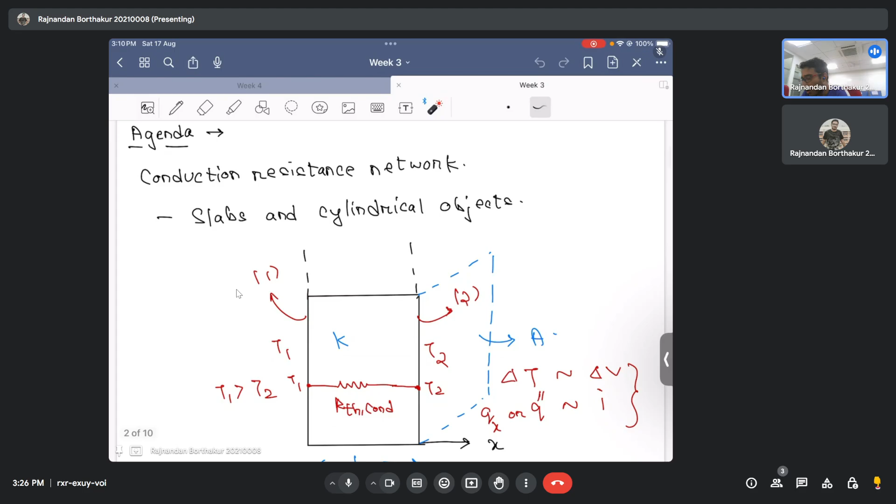But before that, let's quickly recap what we did in the previous week. We looked into the conduction resistance network, another way of calculating the rate of heat transfer in conduction. For instance, in a slab, if there was no heat generation, the mode of heat transfer is conduction, and the direction of heat transfer is one-directional, then an alternative way of calculating the rate of heat transfer is by using the conduction resistance network analysis.

And I said that this network philosophy that we saw can also be extended to radiation and convection as well.

Nevertheless, you need to understand that when you write the rate of heat transfer, in this special example, one face was maintained at temperature T1, the other at T2, and so long as there was no heat generation and thermal conductivity was constant, I can represent the temperature profile as linear. In that case, I can use the resistance network, which lets me write the rate of heat transfer as the difference in temperature between the two faces divided by all the resistances that come into the picture between the two temperature nodes.

For instance, in this case there is only one resistance offered by the slab, and that's why it becomes L by K. Now, we also discussed under what assumptions this resistance network is valid.

And thereafter, what we did is we solved a couple of good problems related to this resistance network.

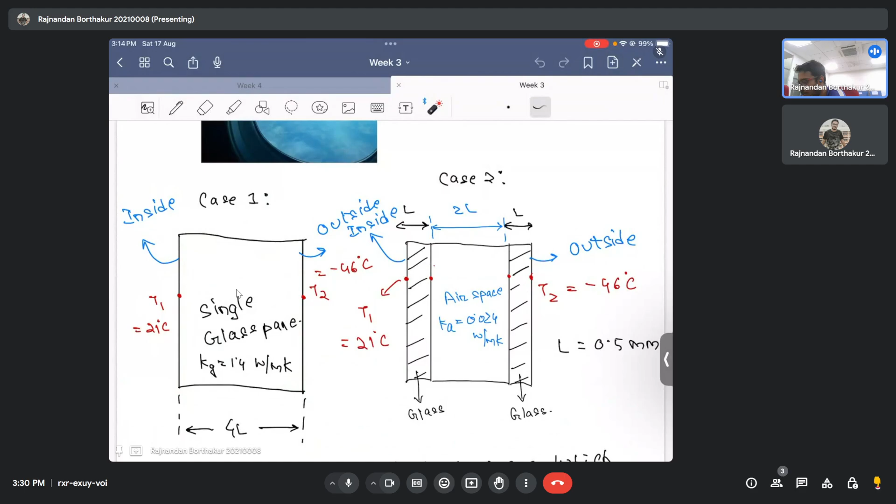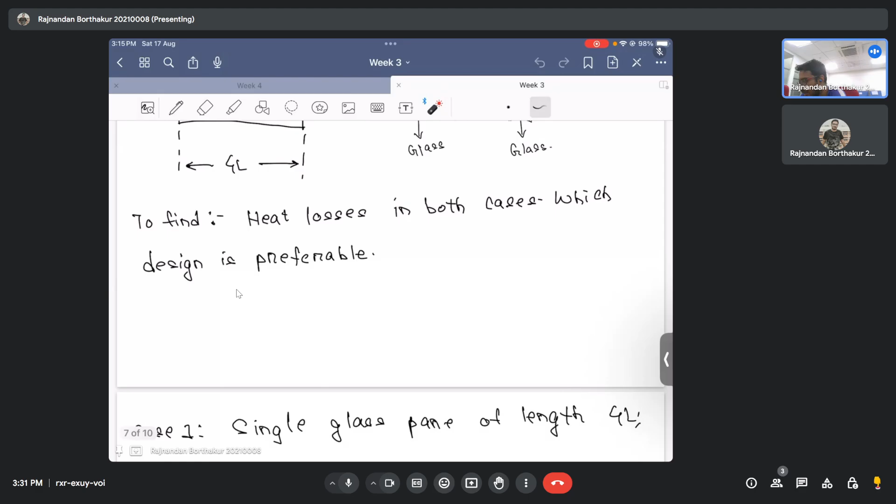We saw that instead of using a single glass pane, if we use a glass pane and a sandwiching layer of air, the rate of heat transfer essentially decreases. Using the resistance analogy, we figured out what would be the heat flux for the two scenarios: first, a single glass pane between the two temperature limits, and second, two glass panes sandwiched by an air layer in between.

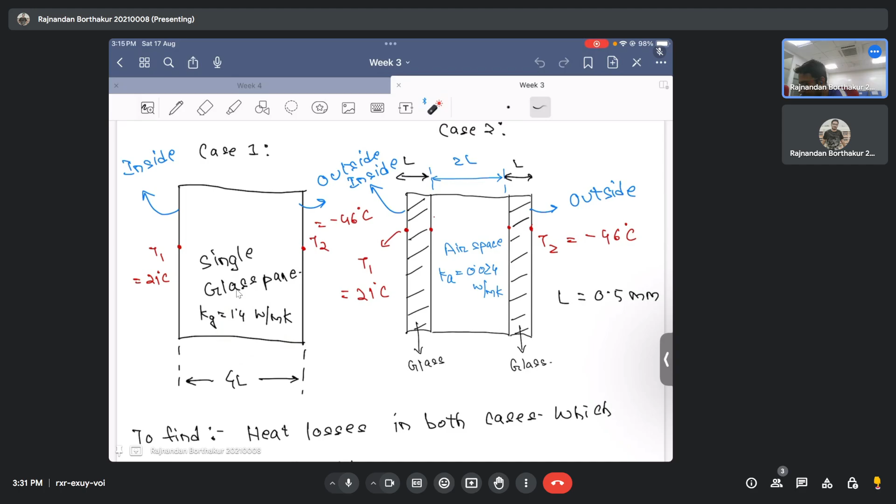The reason why the rate of heat transfer decreases when you use an airspace in between is because the thermal conductivity of air is much less than that of glass. Thermal conductivity of air is 0.024, and thermal conductivity of glass is around 1.4 - about two orders of magnitude less. This is why air acts as a very good resistance, and the airspace acts as a very good resistance to heat transfer.

This resistance is desirable because we always want to minimize the heating load of the aircraft, since that typically leads to more and more use of fuel, which the aircraft is eventually carrying.

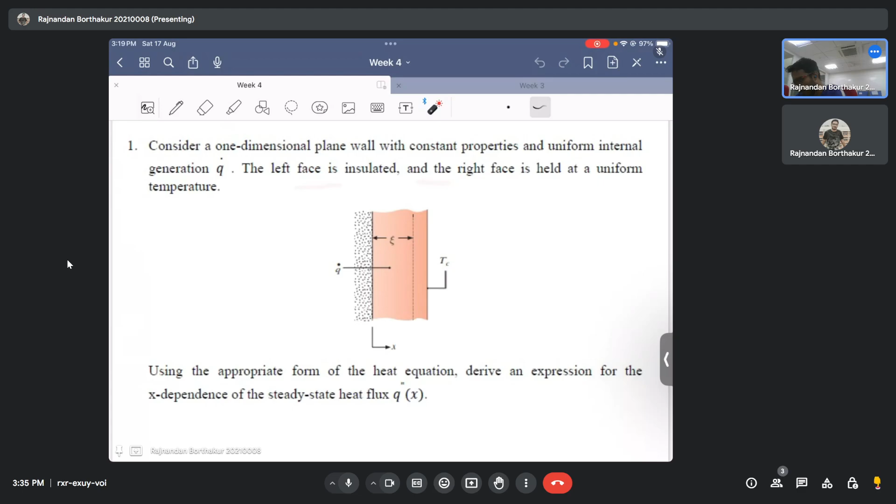This face is insulated, and the physical meaning of insulation is that there won't be heat flux that escapes from this interface to this side, because it's adiabatic. This means that whatever heat is being generated inside the slab needs to be dissipated through the other face.

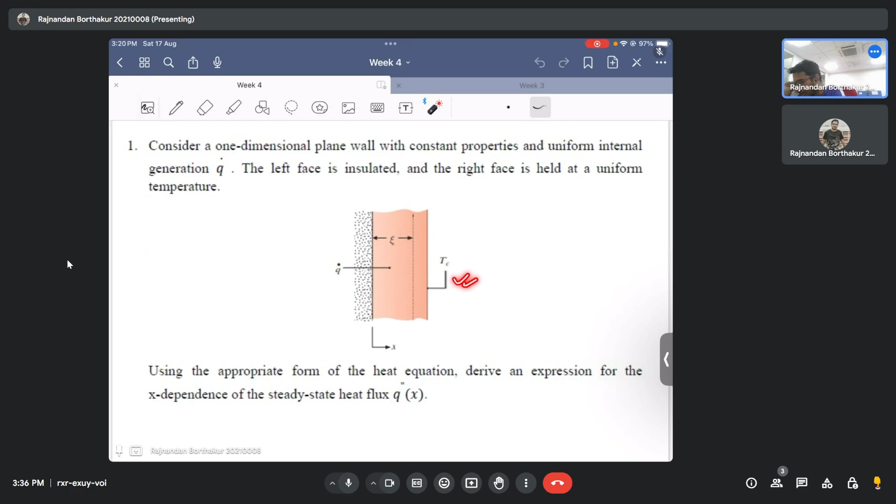They have also said that the right face, which is this face, is maintained at a uniform temperature Tc. If this is the scenario, they're asking us, using the appropriate form of the heat equation, derive an expression for the x dependence of the steady state heat flux Q double prime of x.

So this is what they have asked us to do. I'll wait here for some time. You guys can read the questions once again, and then I'll show you how the solution basically looks like.

All right, I hope you guys have gone through this question. So let's first begin this problem by stating down the assumptions that we have. Let's first write down the assumptions.

Although we don't do this in all the problems, it's a good practice to start off your problem by writing down the assumptions. It gives a clear picture for you, and whosoever is checking your copies gets a good impression that you understand the problem and know when the governing equations we write are essentially valid, which comes from the assumptions. So it's always a good practice to write down the assumptions.

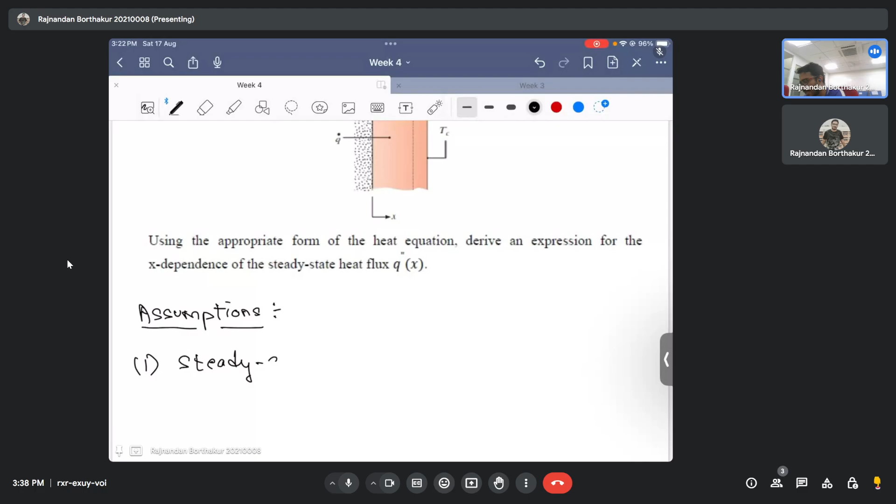So the first assumption, as we have seen multiple times, is that we will consider the steady state condition. I would add one line: steady state condition with constant properties, meaning that I don't have anything that is now a function of time. Also, my properties, for instance in this case the thermal conductivity, is constant and is not a function of time or space in this scenario.

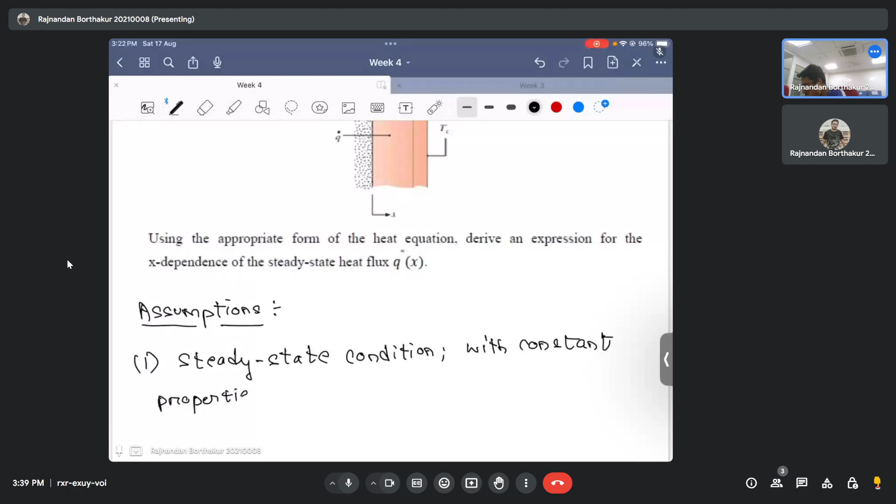The second assumption is related to something known as heat generation. It says that this slab experiences a uniform internal heat generation Q dot. This means that your Q dot is not varying with space or time. Of course it is not varying with time because we are considering steady state, but Q dot is also not a function of space, which means I have uniform volumetric heat generation.

And of course the third assumption, which we have used and always use multiple times, is that we are considering one dimensional heat transfer. So I would write here: heat transfer is one dimensional. I hope you guys are clear with the assumptions.

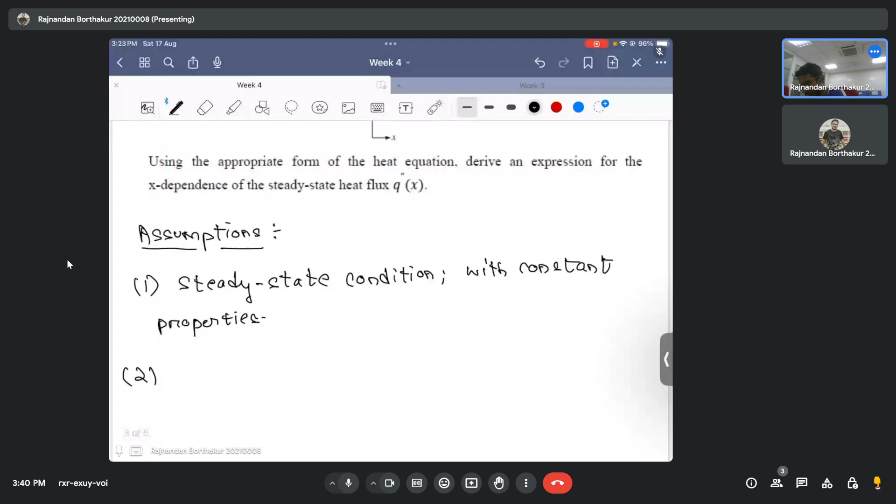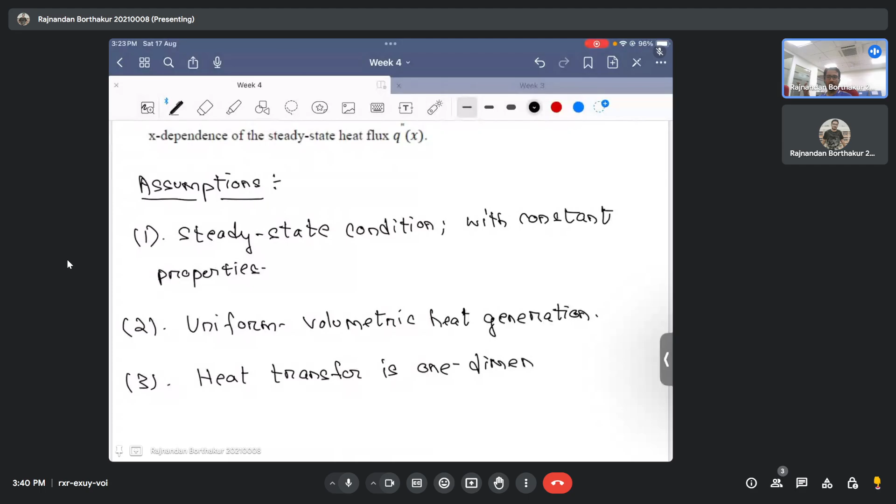All right guys, so what we'll now do is we will start off with the governing equations. So the next step, as you all know, is basically writing out. What do we need to do? See, the question asks us to find an expression for the x dependence of the heat flux. So the heat flux comes into the picture. What basically relates the heat flux to the temperature is the Fourier's law, right?

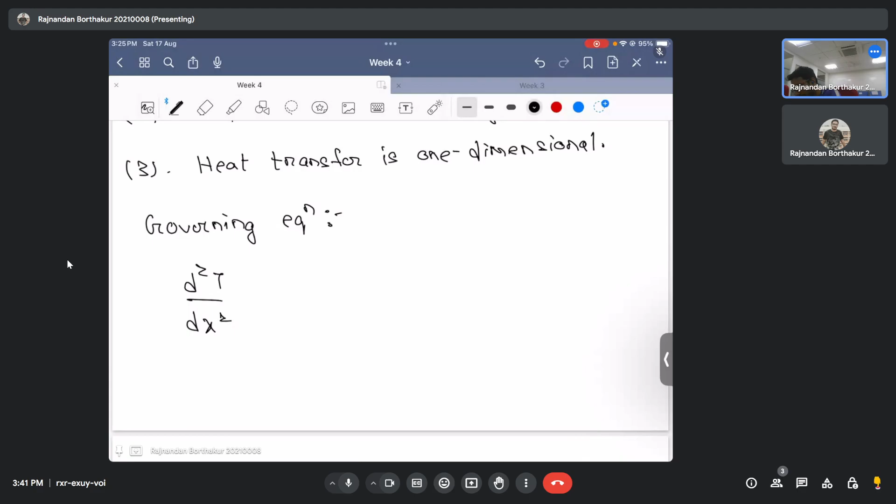So we'll start off by writing the governing equation, which is basically the one-dimensional heat equation, and from there we will try to see how the flux is related to this heat generation. So the heat diffusion equation takes the form, considering all these assumptions we have seen, that your thermal conductivity is constant, it's a 1D heat transfer problem, and your heat generation is uniform. In this scenario, your governing equation, which governs the energy balance only, and which we also know by the heat diffusion equation, looks something like this: d2T by dx2, and this is plus Q dot by k, and this becomes equal to 0.

And then what I can now do is, see, I don't want the temperature distribution. What I want is the heat flux. So what I will now do is, very carefully I will write this as the first term, d/dx of dT/dx, plus Q dot by k equals to 0.

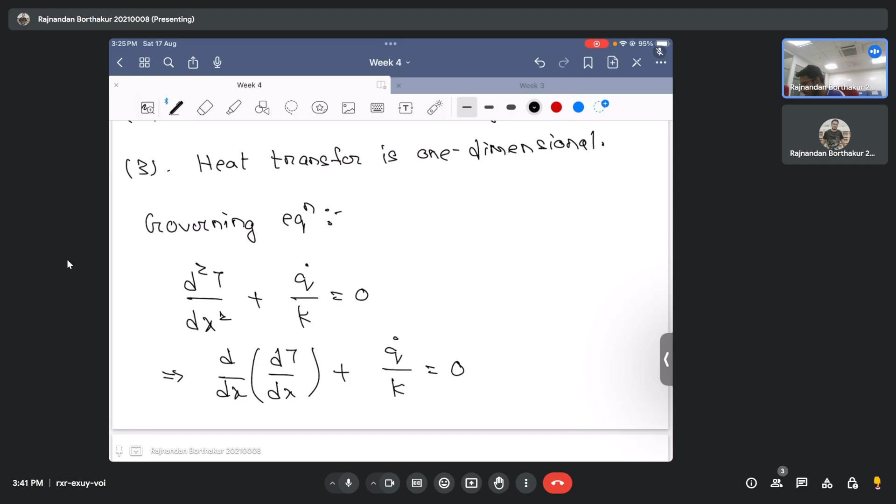All right, so what I will now do is take this Q dot by k to the other side, which means it is d/dx of dT/dx equals minus Q dot by k. And since we need the flux, and for flux we can use Fourier's law, which says that flux is directly related to the temperature gradient, meaning we need to evaluate this dT by dx. Now that is rather simple, right? Because we can integrate this equation.

Okay, and when we integrate it, of course, we'll do an indefinite integration. So if we integrate this with respect to dx, this becomes dt dx, and this becomes minus q dot by k x plus a constant c1.

So now you guys need to tell me, how do we evaluate this constant c1, because c1 is an unknown to our problem, right? So this is very simple, right?

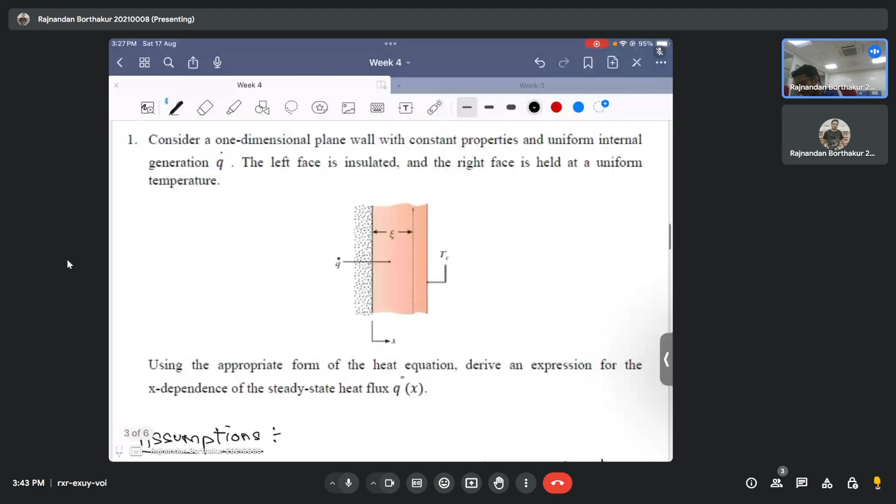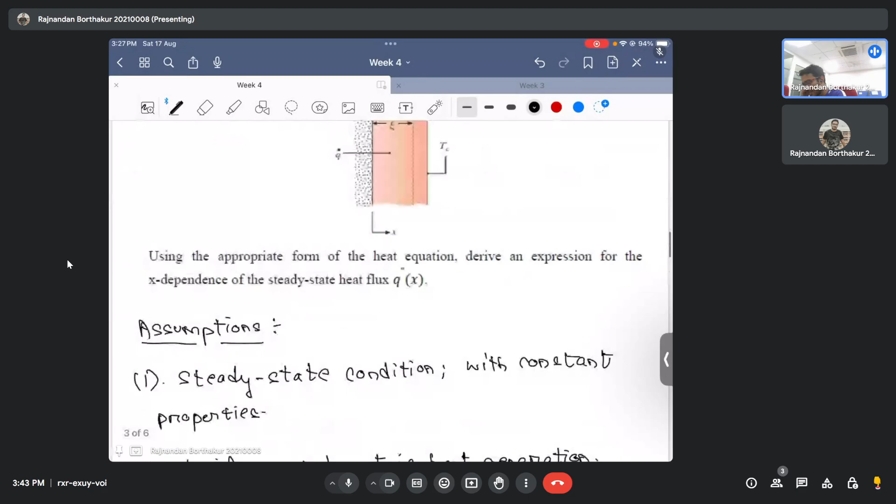That is typically because in your problem it has been stated that for this slab, the face on the left hand side is insulated. What does it mean that the left face is insulated? It means that your flux evaluated at x equals to... if I take my coordinate system from here, this means that my flux at x equal to 0 is basically equal to 0, and this is the physical meaning of insulation. So q double prime evaluated at x equal to 0 is 0.

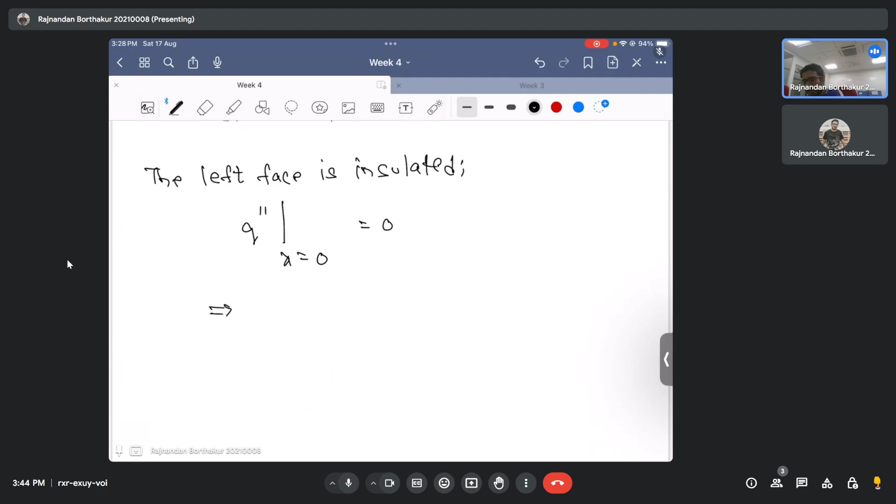And now I know what q double prime is. From Fourier's law it can be written as minus k dt by dx evaluated at x equal to 0, which is equal to 0. This simplifies to dt by dx at x equal to 0 is 0. This is obtained from one of the boundary conditions that we saw. So this is equation 1, and this is equation 1a, which is basically applying the insulation boundary condition on the left face.

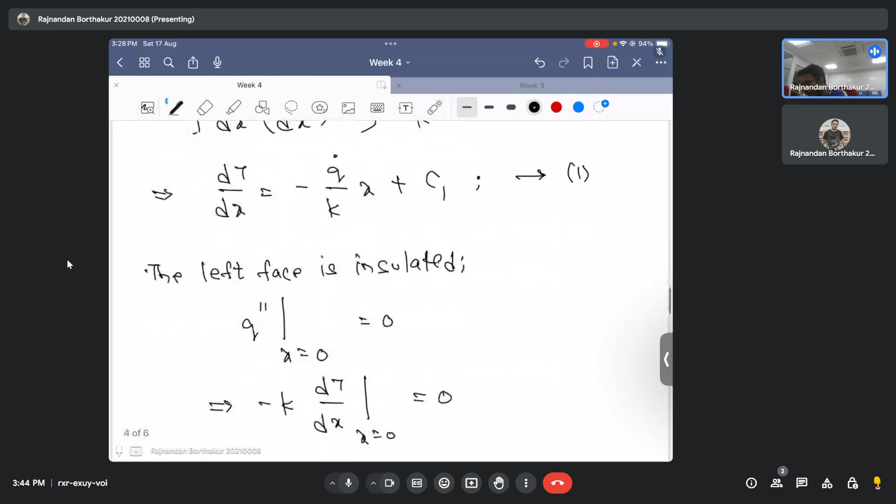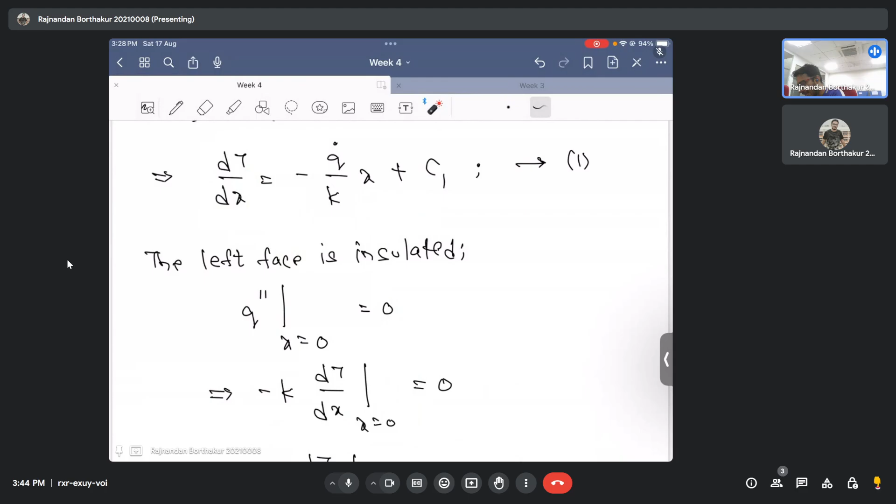So if I substitute 1a in 1, what do I get? At x equal to 0, dt by dx is basically equal to 0. That is basically from here, which means that c1 indirectly comes out to be equal to 0. That is using boundary condition 1a into equation 1.

So the idea is, I substitute 1a onto 1, and then what do I get? I get 0 equal to 0 plus C1, which means your C1 is basically equal to 0. Therefore, your temperature gradient dt by dx simplifies to minus q dot by k times x.

All right, so we are almost done. Now what do we require? They're asking us not the temperature gradient, but the flux. So your heat flux, by Fourier's law, is basically minus k times dt dx. If you substitute the value of dt dx into this, what you get is your flux to be equal to q dot x.

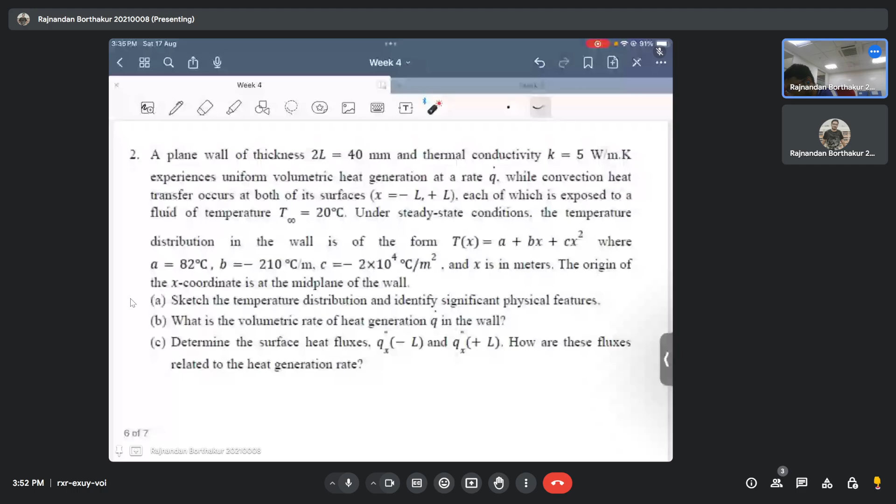It says there is a slab. We have drawn a slab, and the coordinate system is such that the axis is at the mid plane of the slab. So this is at x equals 0, this point is x equal to L, and this point is x equal to minus L. I hope the physical system is clear.

Now this slab bears uniform heat generation of Q dot, and the temperature distribution of this slab is given to be T of x equal to A plus Bx plus Cx squared. I'm sorry there is some lag on the screen due to a network issue, but I hope you can understand the problem we are solving here.

So the temperature distribution is given, and the slab is now convectively cooled by a flowing fluid at its sides. There is a fluid flowing on two of its sides, maybe in some direction you can pick, flowing this way or the other way around.

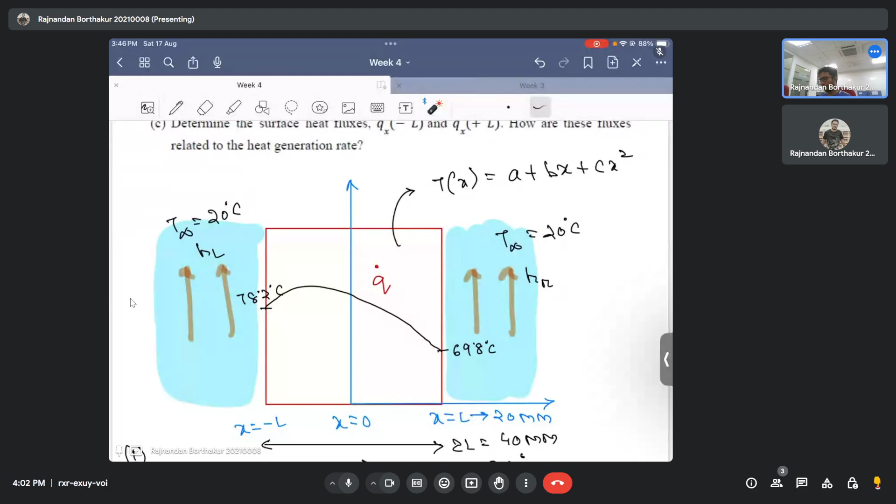We have completed the first part, which says that we need to sketch the temperature distribution, and we have already done that, and we have also identified significant physical features. The first physical feature is that even though the heat generation is uniform and the ambient fluid is at the same temperature, your temperature profile is still not symmetric about the midplane.

The typical reason for this is basically due to the fact that the heat transfer coefficient for the fluid to the right and for the fluid to the left may be different, and that's why your fluxes differ, because the flux that comes out from this surface is directly proportional to the heat transfer coefficient. If the heat transfer coefficients are different, for instance if this heat transfer coefficient is low, then this flux would obviously be low, and so on and so forth.

All right, so I hope you have understood this. So let's get down to business now. Let's calculate the second part of the problem. It says, what is the volumetric rate of heat generation Q dot in the wall? So they're asking us, if you know the temperature profile, now you need to give me what is the value of Q dot.

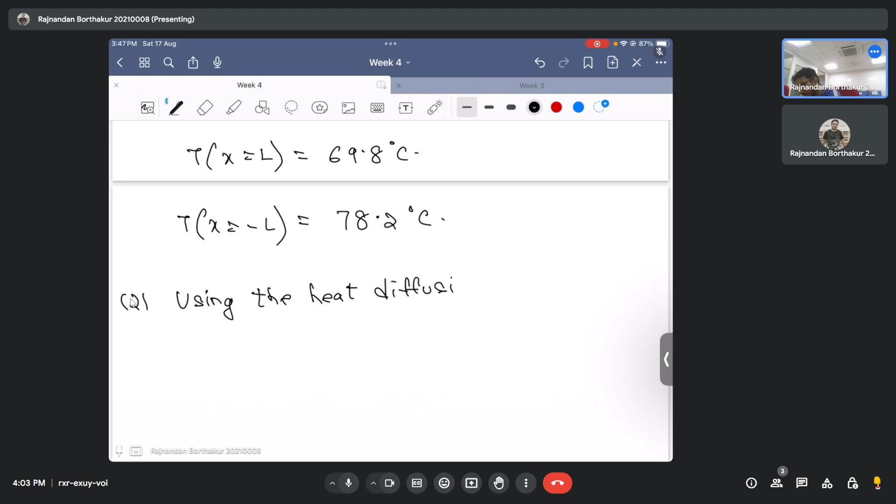Okay, so that again we have done it multiple times. So what we will do is we will use something known as the heat diffusion equation. I'll write it now: using the heat diffusion equation. So what is the heat diffusion equation? It says that d/dx of k dT/dx plus q dot equal to 0.

Considering the fact, again, I have not written the assumptions here, but it's always a good practice when you write it at home, or in your exam, or your college exam, to always start off with the assumptions, draw the physical picture that we drew here, and then proceed with the governing equations. That's always a good way of solving the numericals.

Okay, so basically this is the heat diffusion equation. So what I can now do is, since my thermal conductivity is constant, I can take it out of the differentiation and write it as d2t by dx2 plus q dot by k equals to 0.

They're asking me to calculate q dot, which means I just need to evaluate this d2t by dx2. This is rather simple, because I know t as a function of x is a plus bx plus cx squared, which means dt/dx is b plus 2cx, and my second derivative with respect to x is basically equal to 2c, which means d2t/dx2 is equal to 2c.

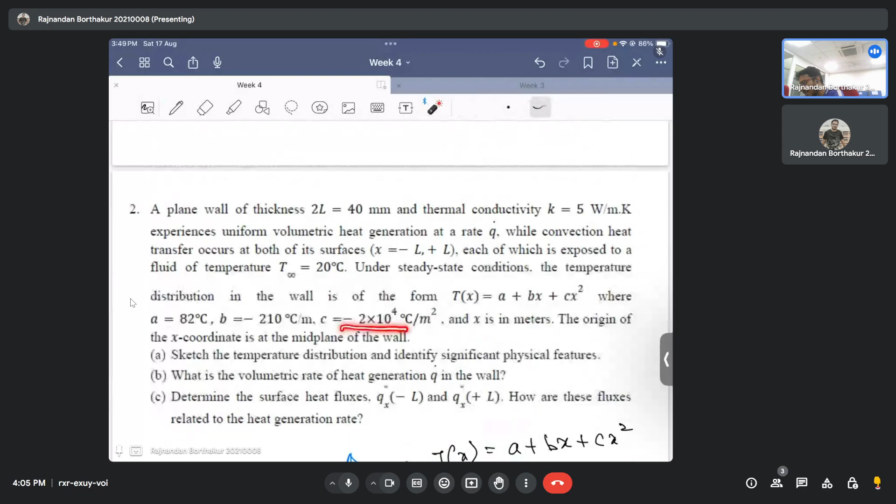So your c is minus 2 into 10 to the power 4 degrees Celsius per meter squared, and your thermal conductivity k, it is 5 watt per meter Kelvin. So q dot, which is basically your volumetric heat generation, becomes minus 2 times c, which is minus 2 into 10 to the power 4, so this becomes plus, and this becomes 2 into 10 to the power 4 into 5.

If you simplify this, your q dot, that is your volumetric heat generation, comes out to be 2 into 10 to the power 5 watt per meter cube. So this is the second answer that the question was asking us. They're asking us to calculate the magnitude of the volumetric heat generation, so the magnitude is this 2 into 10 to the power 5 watt per meter cube. I hope this is clear to you.

All right, let's now go into the third part, which is basically part C. Let's try to understand what part C says. They're asking us to determine the surface heat fluxes Qx at minus L and Qx at L, and how these fluxes are related to the heat generation. The second part we'll do later on.

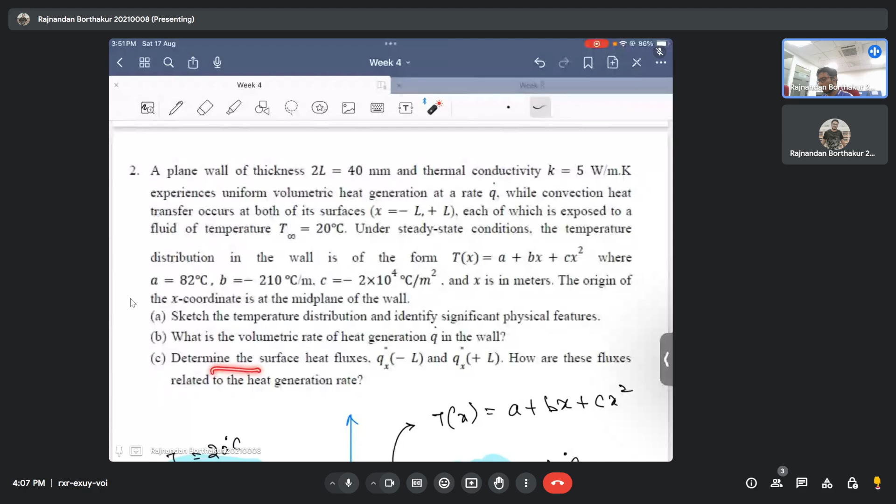First, let's calculate what are the fluxes at x equal to L and at x equal to minus L. As I have said, these fluxes are not going to be equal in magnitude, and we will see shortly. So how do we calculate the flux? I know that from Fourier's law...

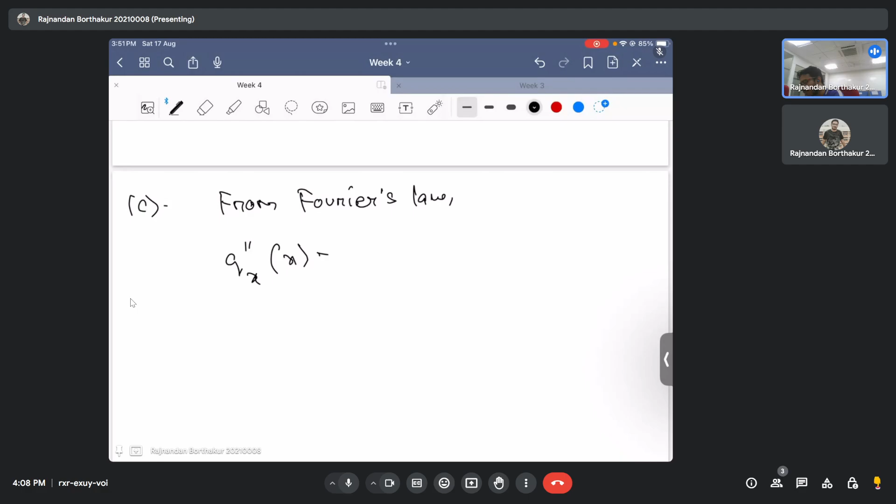My flux, that is q double prime of x in the x direction as a function of x, is minus k times dt/dx, where my temperature profile is of the form a plus bx plus cx squared. So you just need to substitute the values. If you plug in the value, your flux q(x) becomes minus k times dt/dx, which we calculated is b plus 2cx. You already know the magnitude of k, b, and c.

So therefore, your flux at x equal to minus L is basically minus k times b minus 2cL. If you plug in the values, you will get this value to be around minus 2950 watt per meter square. This is your flux q double prime of x at x equal to minus L.

Maybe I should write it in this way, at x equal to minus L. So this is one part of the third part. Similarly, if you do the same exercise, you can find out that your flux at x equal to plus L is basically minus k times b plus 2cL. If you do this, you will get a value of around 5050 watt per meter square. So this is your flux qx at x equal to L.

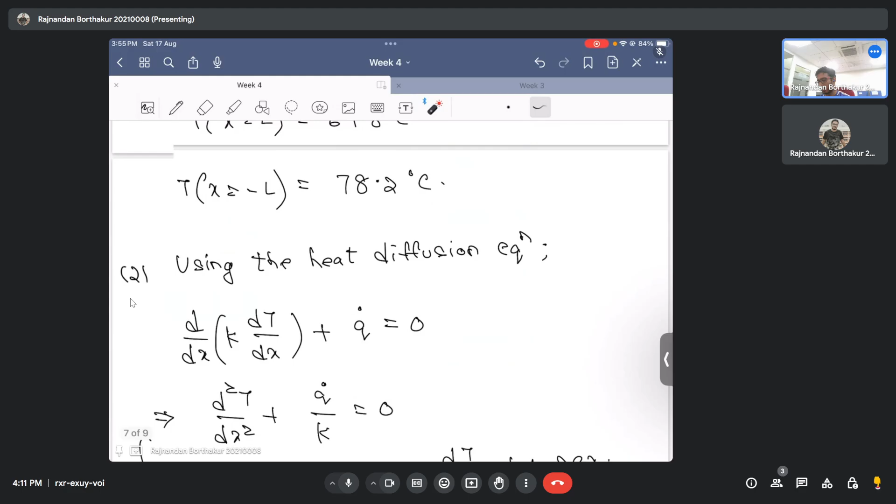Now, if I can similarly draw the similar analogy that in the positive x-axis, looking into the face at x equal to L, my direction of heat transfer would be from this face to the fluid, and that's why the direction of heat flux, which of course is a vector quantity, is in the positive x-axis, and that's why we have witnessed a positive sign in its calculation and in its answer. So this is something that you guys need to understand.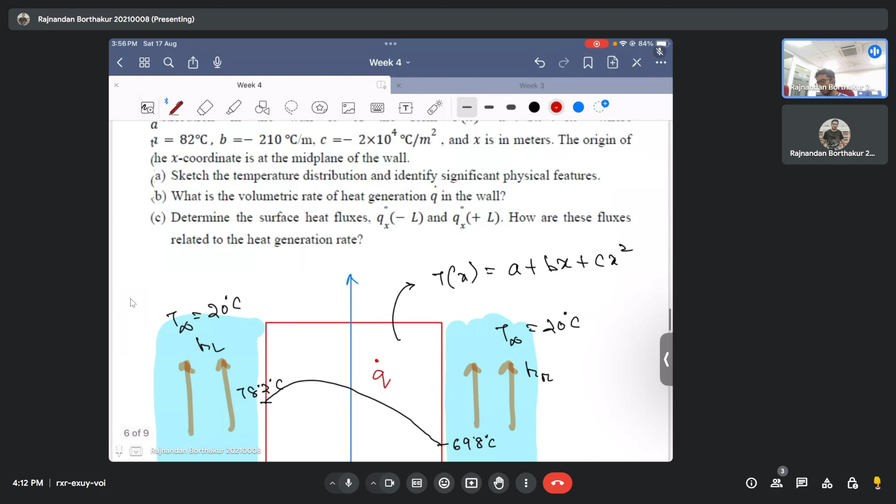So finally, they're asking one more important problem, which is basically the fact that they're asking how are these fluxes related to the heat generation rate. And for that, we will do something that we have done maybe in the first class.

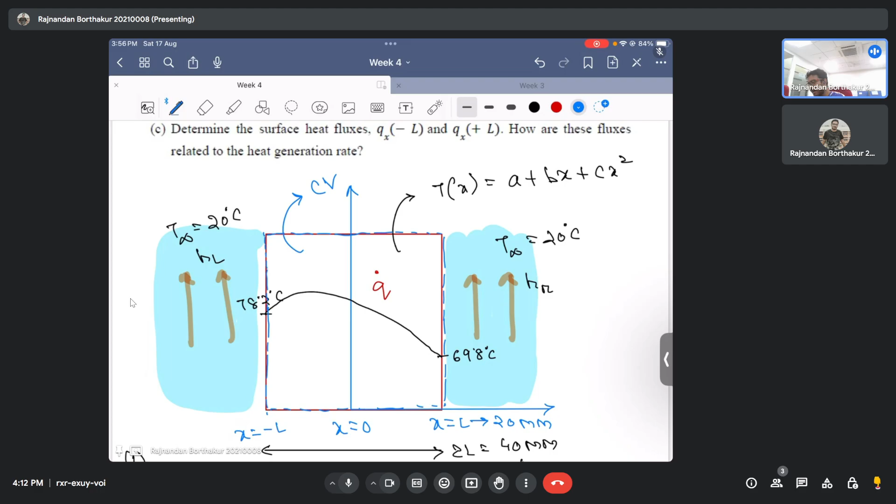So what we will do is we will choose a control volume now encompassing this wall or the slab. So what we will do is we will choose a control volume, maybe like this, maybe like this, and maybe like this. So we'll choose a control volume encompassing the slab, and what we will do is we will apply the law of conservation of energy in this control volume.

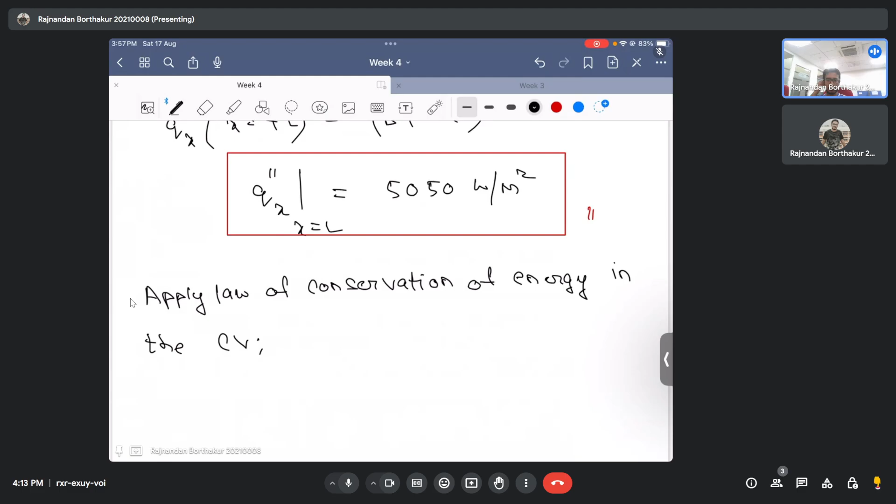So what we will do is we will apply the law of conservation of energy in the CV, meaning my control volume. So if I apply the law of conservation of energy, I now need to apply it, and it should be written in terms of the rate of heat transfer, or the heat flux. You can write it in terms of the heat flux as well. That's completely up to you.

So if I write that, what I will get is basically Q dot. The energy that is coming inside the control volume, let's say it is Q dot in, because by energy I only mean heat energy, and all other energies we are not considering throughout this course, until and unless we have mentioned it otherwise. So Q dot in, that is basically the rate of heat transfer coming inside the control volume, minus Q dot out, plus Q dot gen, basically the heat that is being generated inside the control volume, and this should be equal to 0.

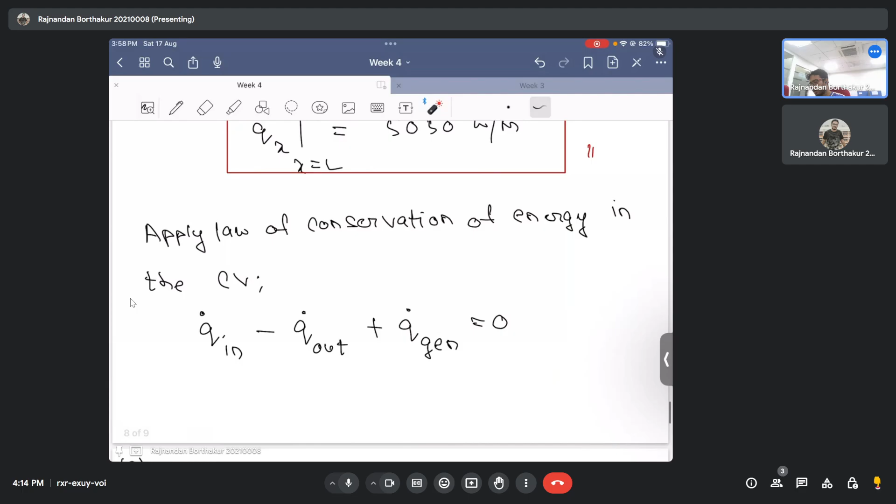Now, you need to understand that throughout this slab, the temperature is always higher than that of the ambient fluid, which means that my slab will always dissipate heat to its ambient and not the other way around. Which means that in terms of the control volume approach, my Q dot in will always have to be equal to 0, typically because the slab is always at a higher temperature than the ambient fluid. It is the slab that is losing heat to the fluid and not the other way around. So that's why whatever heat is being generated will be dissipated out and not inside the slab.

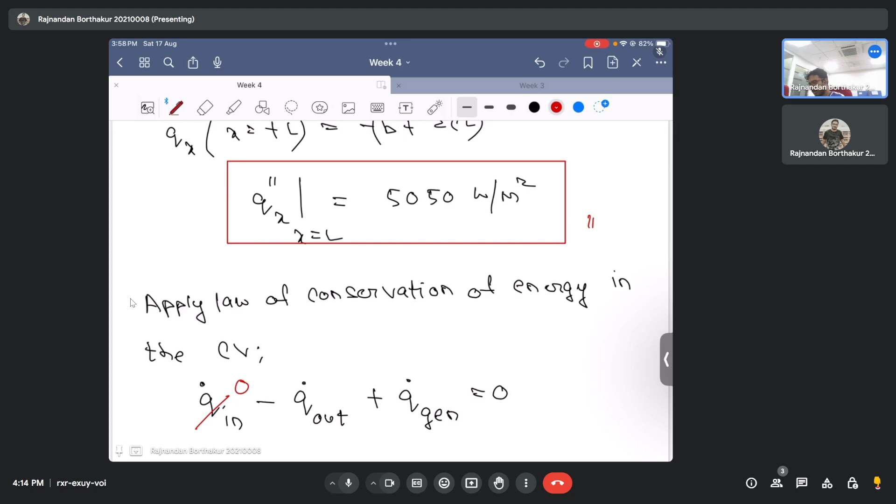So if my Q dot in is 0, this then simplifies to the fact that Q dot gen is basically equal to Q dot out. So this is something that we got from the energy balance when written in the control volume that we saw.

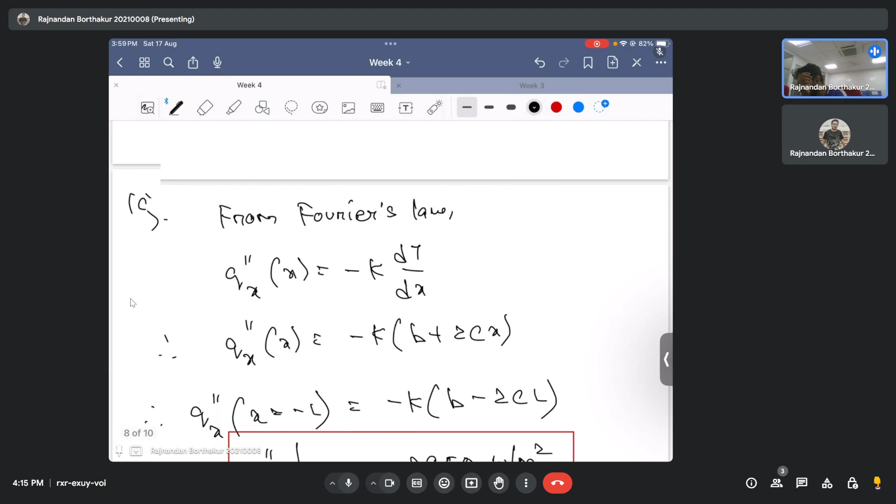Now here is the catch. What is Q dot out? Since this heat transfer is basically 1D, whatever heat is generated inside because of this heat generation, the only way it can leave this control volume is through fluxes at x equal to L and at x equal to minus L. Which means Q dot out has to be numerically exactly equal to the summation of the flux at x equal to L and the flux at x equal to minus L.

That's why I'll write this as Q dot out, which is basically equal to the magnitude of Q double prime at x equal to L. By magnitude I mean I'm considering the net energy leaving the control volume through these fluxes, and that's why I'm considering its magnitude. Since this is Q dot, these fluxes need to be multiplied by the area, so this becomes A times Q double prime at x equal to L, plus Q double prime at x equal to minus L, again considering the magnitude times the area.

So at x equal to L, I have this flux at 5050, so it's 5050 times the area, plus, since I'm considering the magnitude at x equal to minus L, it becomes 2950 times the area. You need to understand why I considered the magnitude - this is because I am looking at the control volume approach and seeing the net energy that is leaving the control volume. If you do this, you get it to be exactly around 8000 times the area.

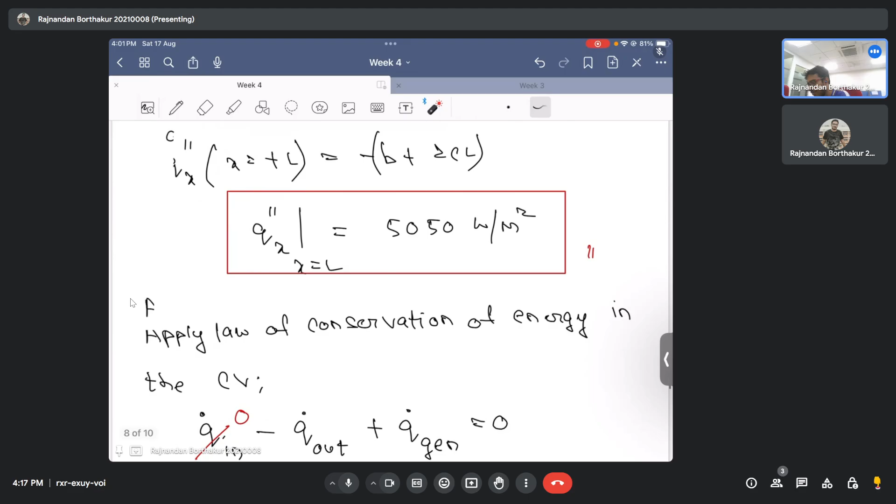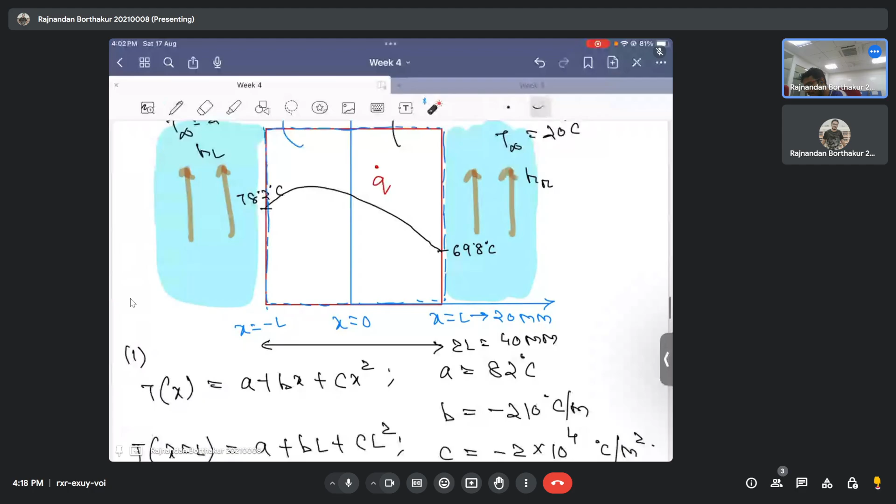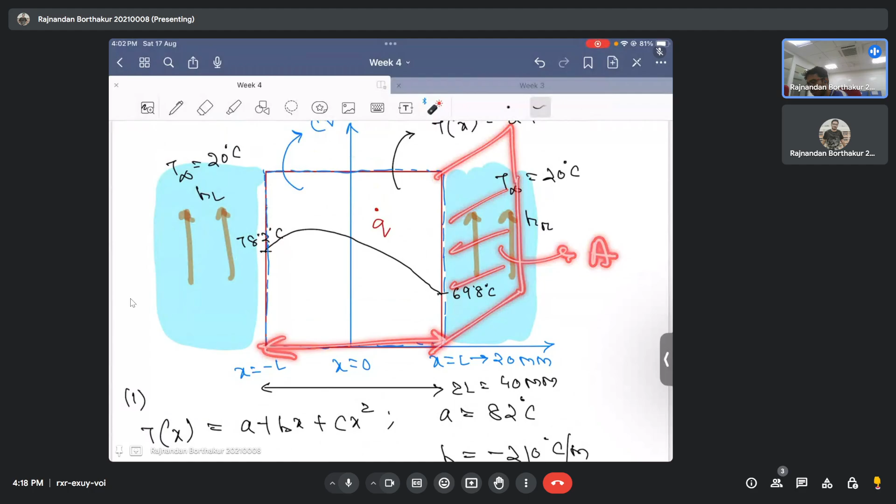The volume of the slab is rather simple - it is the length of the slab, which is twice L, multiplied by the cross sectional area A. So this entire length, twice L, multiplied by this cross sectional area A, gives me the volume of the entire slab. So this becomes Q dot times the volume, which is twice L multiplied by A.

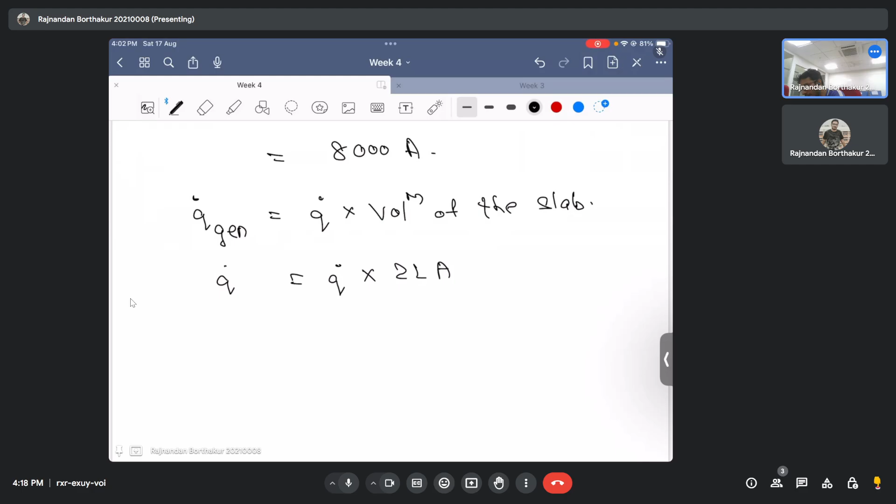If you evaluate this, it's very interesting. Q dot is 2 into 10 to the power 5, multiplied by 2, and your L is 20 mm, which can be written as 20 into 10 to the power minus 3, times the area. If you do this math, you will get exactly 8000 times the area, which means your Q dot gen is basically equal to 8000 times the area.

This is exactly equal to your Q dot out, and this is what we are actually proving from the energy balance. The energy balance says that your Q generated has to be equal to the Q flux going out from the surface. Numerically also, we've seen that Q dot out, the summation of all fluxes through the areas, came out to around 8000 times the area, and Q dot gen also came out to 8000 times the area, which means the steady state energy balance indeed holds good in this case. This is how the third part of the question shows how your flux is related to the heat generation inside the slab.

Okay, so this is the last part of the question that we are required to solve. I would again stop here for a couple of time. I'll give you a homework here. The homework is based on this.

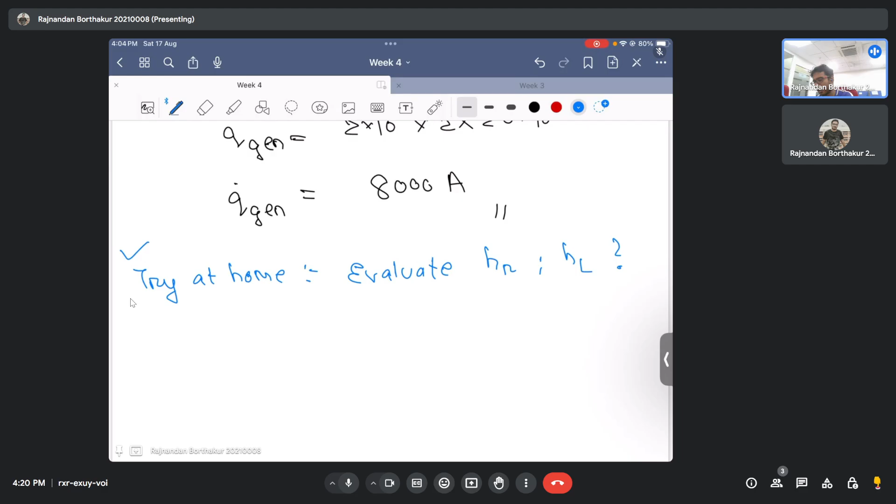Okay, so with this, we end the second question. I would stop here again for a couple of time.

You can think about this, how we proceeded, how we came to the conclusion that the energy balance indeed holds good if we also follow a control volume approach. Why and how did we conclude that the heat transfer coefficient on the right and left face, even though we have the same fluids, are different, and so on. I believe this is a very good question, and it will give you a plethora of insights into heat generation that is taking place. Yes, the problem was a little bit simpler, but it gives you a magnitude of insights into the temperature profiles that can take place inside heat generations, taking place in a slab, and so on.

Okay, so I'll stop here for a couple of time. I'll just come in 2 minutes. I'll fill my mug, and I would ask you to reflect on the solution of this question. Try to understand how we did it and why we did it.

And after this, we will look into something which is known as heat generation in cylinders, and we will solve a similar problem. However, in cylindrical coordinate systems, where we will see how we need to handle heat generation inside a cylindrical body.

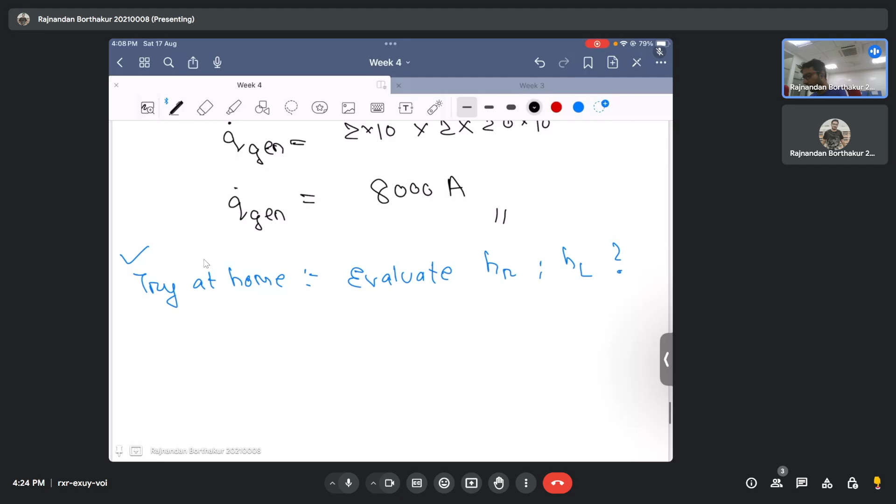So now what we will do is we'll look into, yeah, so I hope you have understood the homework task. So your task is to evaluate the heat transfer coefficient on the right and left face. This is something that we need to do.

But now what we'll do is we'll look into something which is heat generation inside a cylinder, inside a cylindrical system. And for that, I will stop here again for a couple of minutes. I want you to read the third problem that is on your screen.

Okay, so I hope you have just browsed through the question. So let us try to understand what the question says. So it says that consider a long solid tube insulated at the outer surface R2, and cooled at the inner surface R1 with a uniform heat generation Q dot within the solid.

So there is this long solid tube, which is insulated on its outer radius, and it is being cooled by a fluid at its inner radius, where now there is heat generation taking place inside the solid. Such a system in the physical world you see in nuclear reactors. For example, these nuclear rods are cooled in this way. In the nuclear rod, the nuclear reaction takes place, and that's why you can represent the heat being generated due to this nuclear reaction by a heat generation term, and then it needs to be cooled, which is done by the cooling fluid. These kinds of systems are very common in nuclear reactors. So this is the physical system.

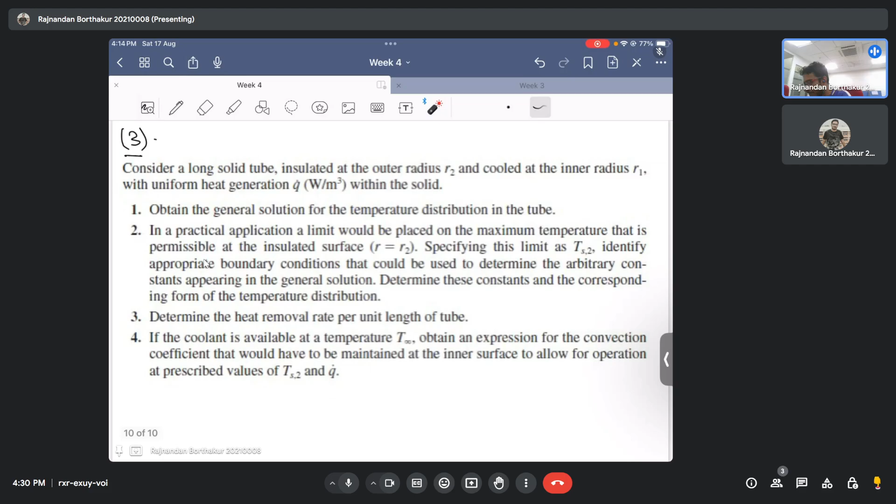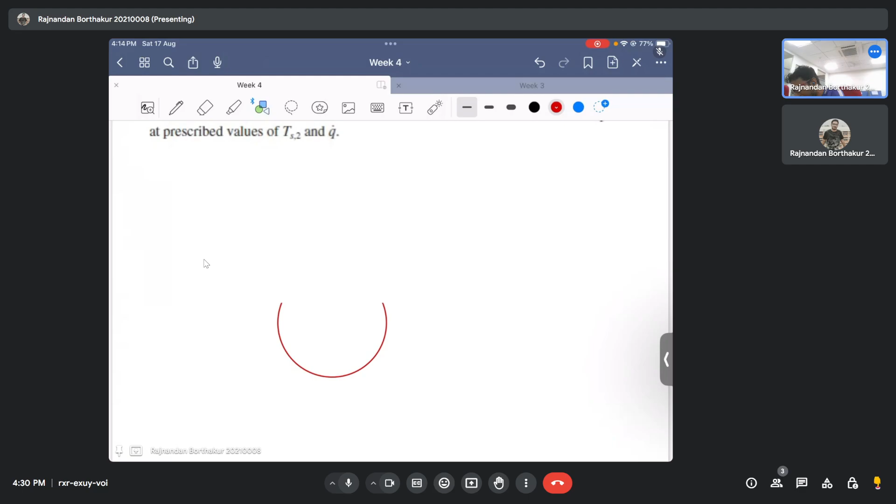So what I will do is begin by drawing the schematic, and you guys need to help me on it. Let's first draw the rod here. We have a radius, let's say R1 — this distance from the center we will consider as R1. I hope you have appreciated that this tube is a concentric tube: it has an inner radius R1, and then let's say it has an outer radius R2, so this radius is basically R2.

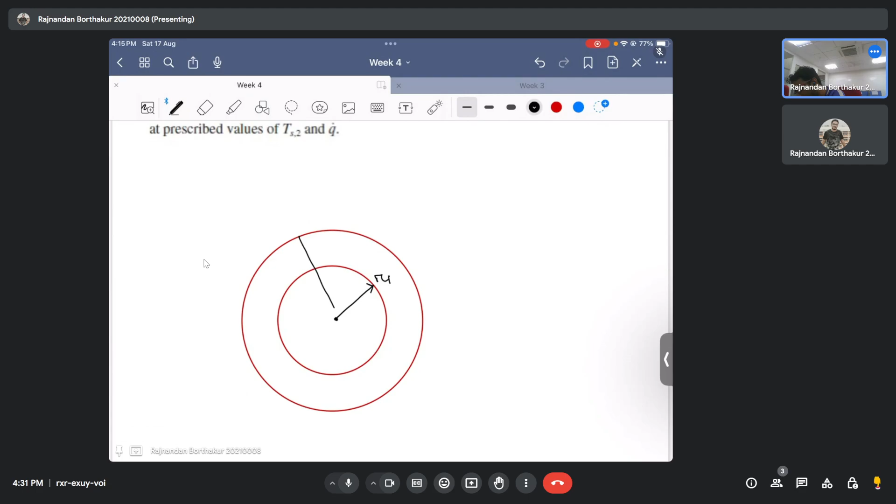Now let's look at the information they are giving. If I draw the length, this tube would basically look something like this, extending to some length L — I'm not drawing the entire length, but this length of the tube is basically L. Try to understand that they are saying this tube is insulated on its surface, which means this surface is basically insulated.

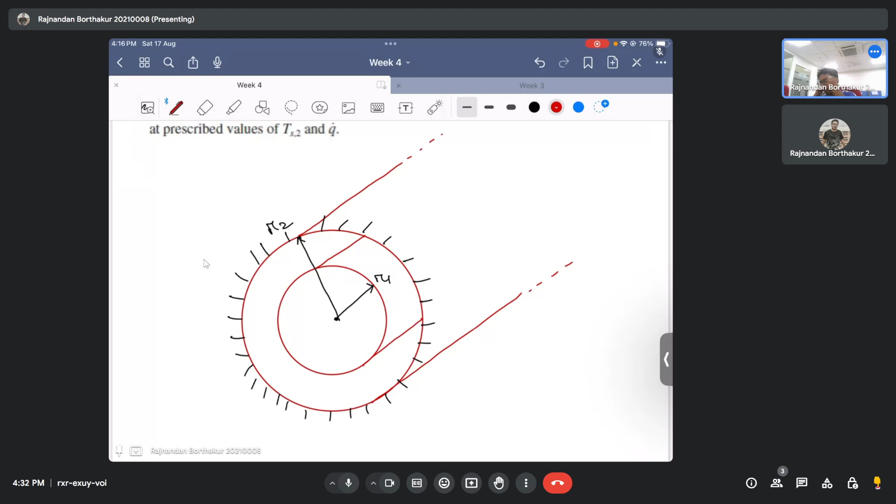By insulation, as we have seen in the first problem, it means that there won't be flux escaping through this outer surface. The insulation philosophy says that the heat flux at R equal to R2 is basically equal to zero.

Now, what they're also saying to us is that we have a cooling fluid. This tube is basically cooled by a fluid, which means we have a fluid flowing through this space.

This fluid is flowing through this space, and you can pick any direction for this flow. First let's draw the axis. Let's say this is my z-axis, which extends in this direction, and your fluid is flowing through this direction. The cooling fluid, as said in the third problem, is at temperature T infinity, and the heat transfer coefficient is H, which we need to figure out.

Also, the final bit of information is that this cylindrical rod is generating heat at some magnitude Q dot, which is the heat generation in the rod material, having a unit of watt per meter cube.

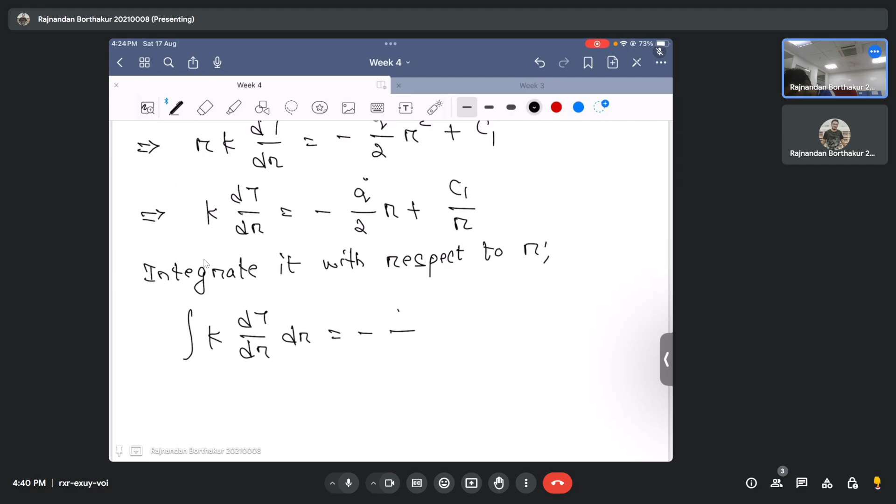So if we do that, what do we get? It's just again integration of k dT dr, dr, equals minus Q dot by 2r dr, integrated with respect to r, then plus integration of C1 by r dr. So this becomes k times T as a function of r, and this becomes minus Q dot by 4 r square. This is simple integration, and integration of 1 by r dr is just ln r, so this becomes C1 ln r plus C2.

And if I just divide this equation by k, this becomes T as a function of r, equals minus Q dot by 4k, r square, plus - here C1 is a constant, C1 by k will also become a constant, so without loss of generality we can still write it as C1, an arbitrary constant - C1 ln r plus, similarly, C2 by k is a constant, so without loss of generality C2 can just be written as an arbitrary constant C2.

So this is your first task, and this is precisely the temperature profile for this rod bearing a uniform heat generation Q dot, where K is the thermal conductivity of the rod, and C1 and C2 are just arbitrary constants, as you have seen.

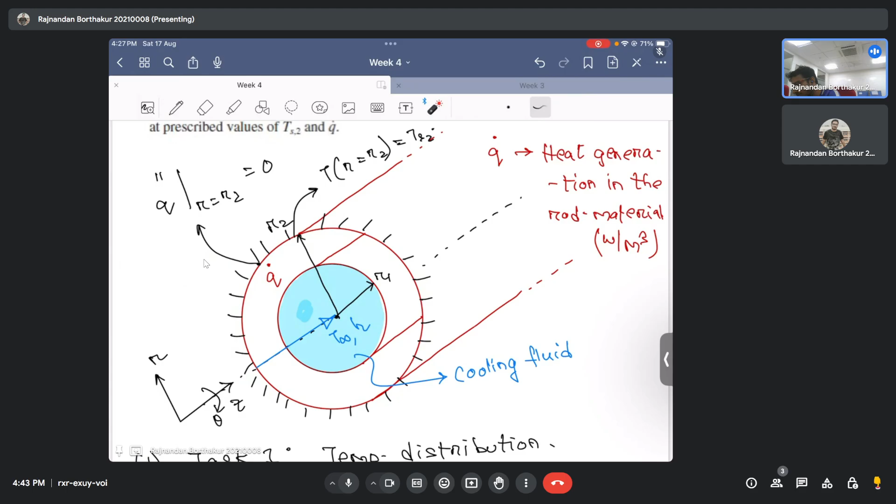In addition, they have also said that the temperature on the surface is prescribed, and this is equal to Ts2, so T at r equal to r2 is equal to Ts2. This is something they have already told us, and we will use these two boundary conditions in order to evaluate the two unknowns C1 and C2.

So we'll do that. The second task is to evaluate the unknowns. So what are the unknowns? C1 and C2. So we'll use the first condition.

So the first boundary condition is that your temperature T at R equal to R2 is equal to TS2. So if we substitute this into equation 1, we'll call it equation 1a. We'll also write the second boundary condition and then do the substitution.

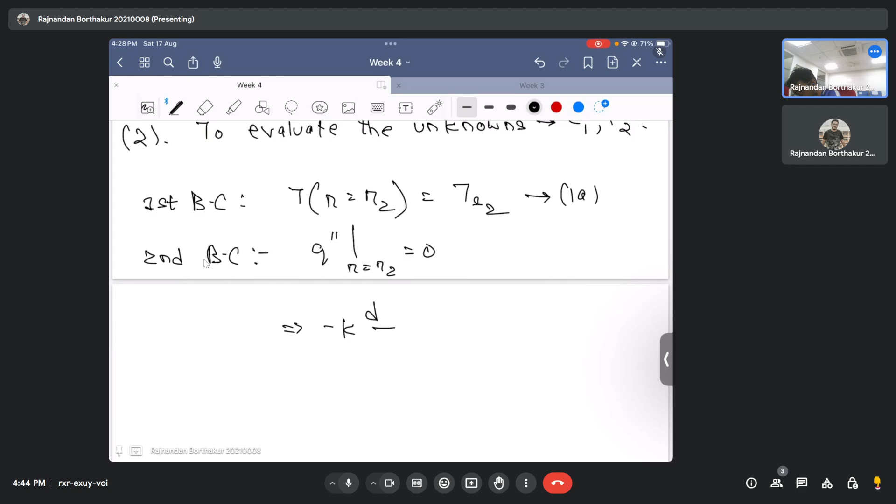The second boundary condition is that the flux at R equal to R2 is 0, which means your outer surface is insulated. If I use Fourier's law, minus k times dT by dR at R equal to R2 equals 0, which means dT by dR at R equal to R2 is 0. This is my second boundary condition.

So now what you need to do is simple. You just need to substitute these boundary conditions 1a and 1b into this governing equation 1. Let's do the first substitution.

The first substitution says T at R equal to R2 is TS2, which means I can write TS2 equal to minus Q dot by 4K times R2 squared plus C1 ln R2 plus C2. This is one condition.

And if I use the second condition, that my dT/dr at R equal to R2 is 0, I need to evaluate dT/dr. One second, did I make any mistake here? Don't think so. Just hold on, I'm thinking... I don't think so, yeah, okay, I think it's fine.

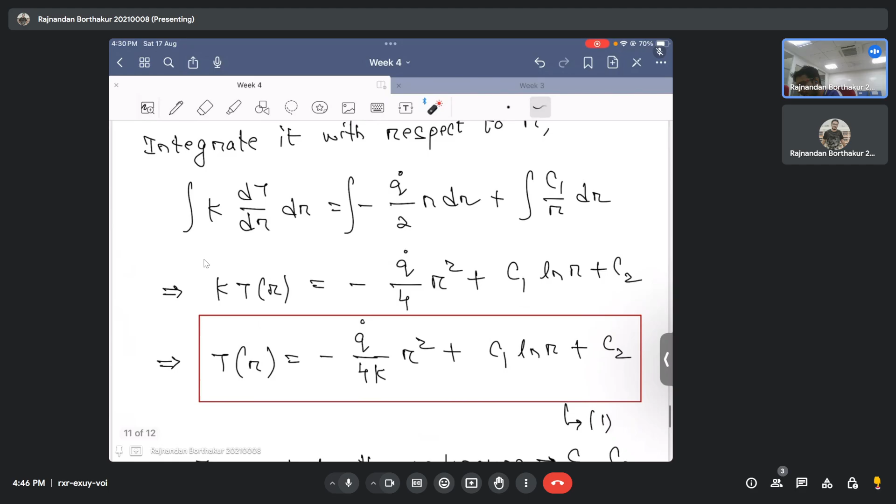So if I evaluate this dT/dr, from equation 1 it comes out to be what we calculated here. So dT/dr is just minus q dot by 2kr plus c1 by r. It's just this. You don't need to differentiate again because we already integrated from the heat diffusion equation.

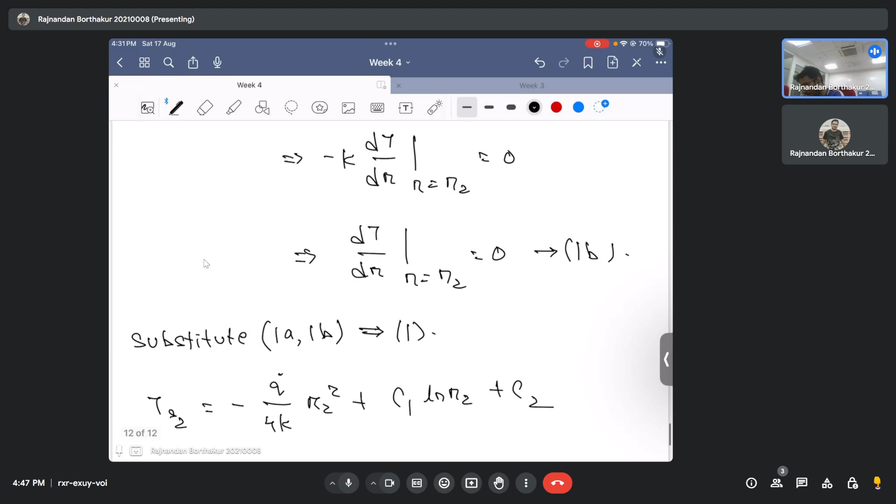So this is dT/dr, which is minus q dot by 2kr plus c1 by r, and at r equal to r2, I have what I have. Hold on, did I make any mistake here? Okay, I don't think so. Let's see.

At r equal to r2, your dT/dr equals 0, which means 0 equals minus q dot by 2k times r2 plus c1 by r2. From here you can evaluate C1. You can see that C1 in magnitude comes out to be around Q dot by 2K R2 squared. This is your value of C1.

Now we will substitute the value of C1 into the first condition. If I substitute the value of C1 into this, I will get C2, the other unknown we are trying to solve for. So we'll substitute here.

So TS2 becomes minus Q dot by 4K R2 squared, plus C1 times ln R2, and your C1 is Q dot by 2K R2 squared, so it becomes R2 squared ln R2. Okay, this should be R2 squared.

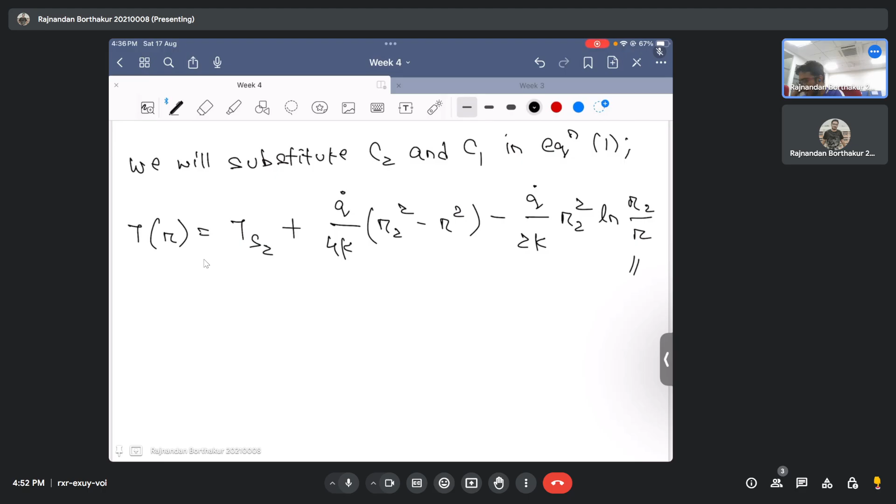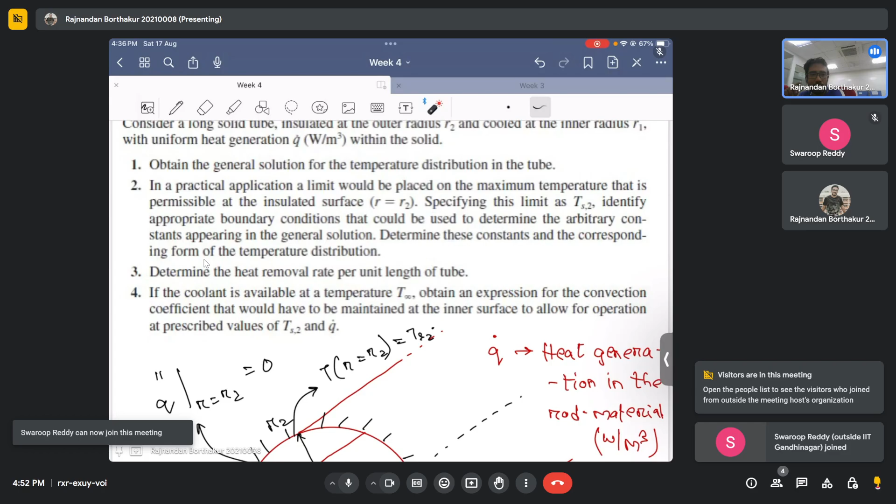Okay, so if you don't have any questions, let's look into the third part. It says they're asking us to determine the heat removal rate per unit length of the tube. So basically there is this rod which was generating heat at some Q dot, and this rod will now dissipate the heat to the fluid. So your fluid is cooling the rod, taking heat from the rod to itself. Since we know that the outer surface is basically insulated, this means that whatever heat is being generated inside this rod will now go to the fluid. In this context, they're asking us to evaluate what will be the rate of heat removal by the fluid from the rod.

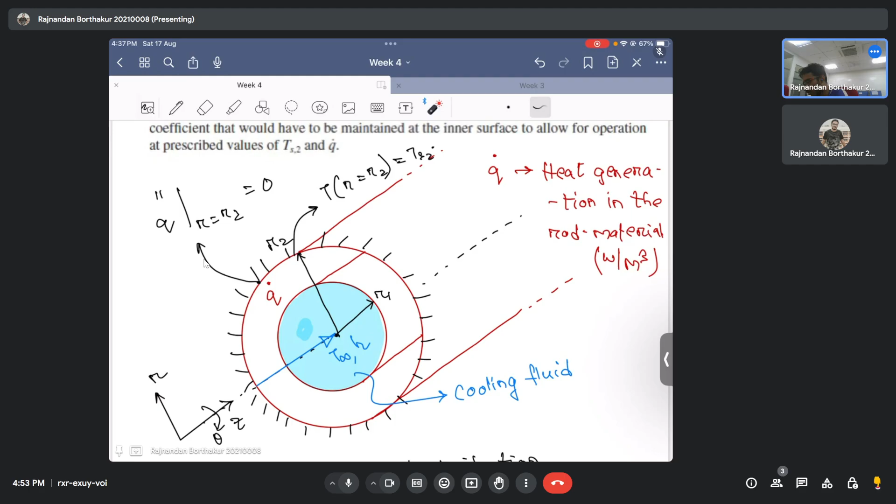I think the picture is clear. So it's very simple now - we'll just use Fourier's law. So the heat removal rate - the third part is estimating the heat removal rate. For that, we will use Fourier's law, which says that your flux at any radial location is basically equal to minus K times your dT by dR. So this is your flux.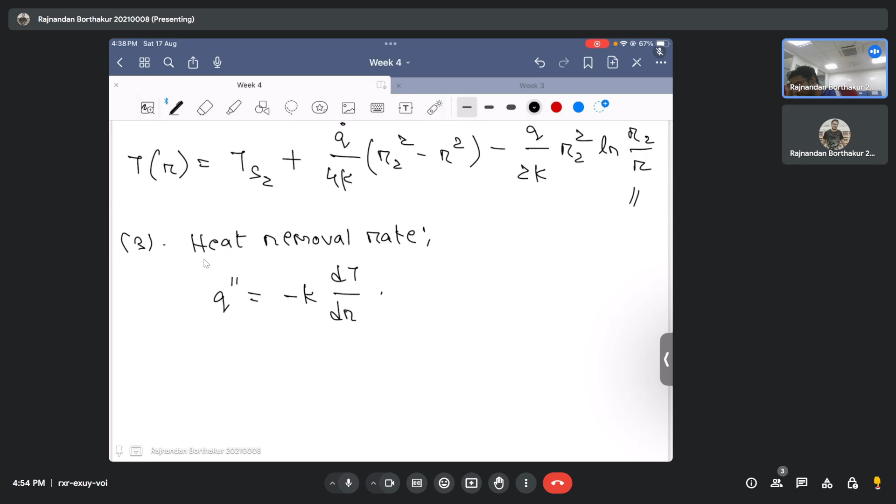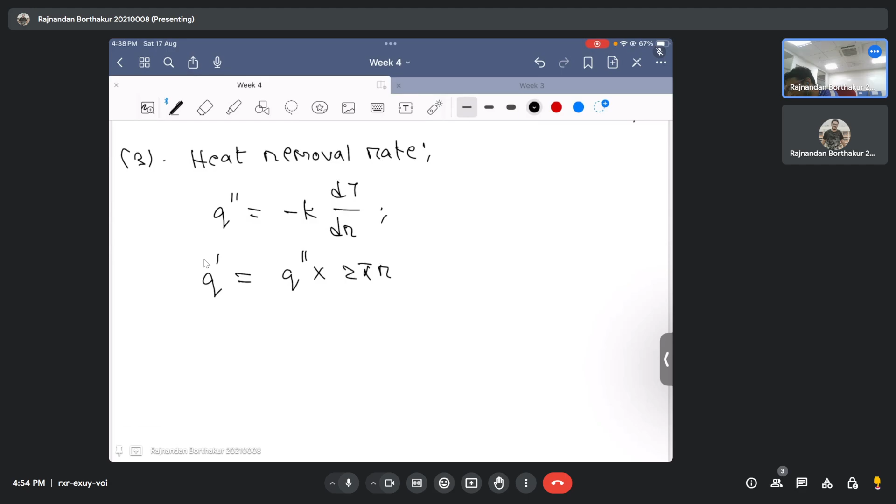So if I want to calculate the rate of heat removal, it becomes Q dot, but since we have already used Q dot for heat generation, we will designate it as Q. What we'll do is calculate the rate of heat removal per unit length, which means it will be Q dash, and this would be your flux multiplied by your surface area - that's why this becomes Q double dash times 2 pi R, not 2 pi RL, because we are calculating it per unit length. So this is your heat removal rate per unit length, the flux multiplied by 2 pi R. So this simplifies to Q dash equals minus K times dT/dR into 2 pi R, so this becomes minus K times 2 pi R into dT/dR. This is your heat removal rate per unit length, and we already know the expression of T.

Okay, so all you need to do is evaluate this dT by dr from this expression of T. Just do a first derivative with respect to r in this equation, and you will see that your Q dot, the heat removal rate, simplifies to something like this.

We now need to evaluate this at r equal to r1, because this heat is being removed by the cooling fluid. So you need to evaluate this dT by dr and substitute r equal to r1, and if you do this math, I hope it's clear why we're evaluating it at r equal to r1.

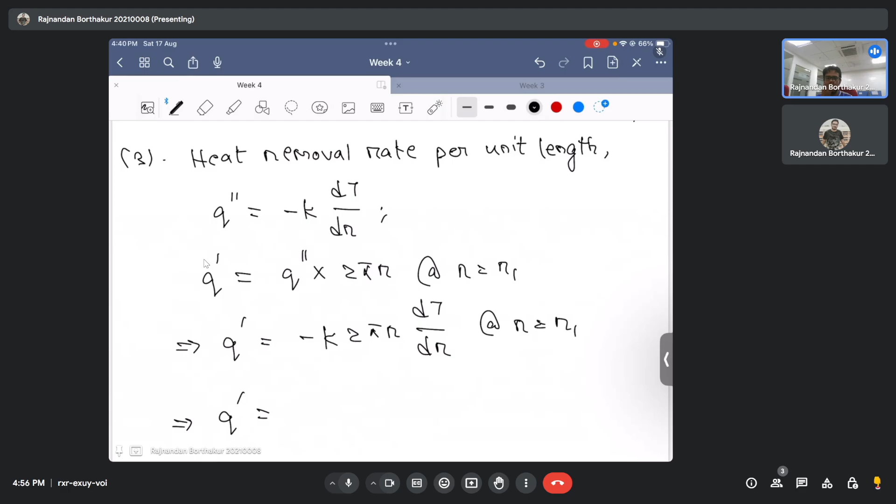The picture is clear, right? The heat will be removed by this fluid from this interface of the cylinder, which means whatever heat is generated inside the cylinder will be dissipated by the flux. That is calculated from Fourier's law, and if we calculate the flux at R equal to R1, it is exactly equal to the heat removal rate per unit length by the cooling fluid.

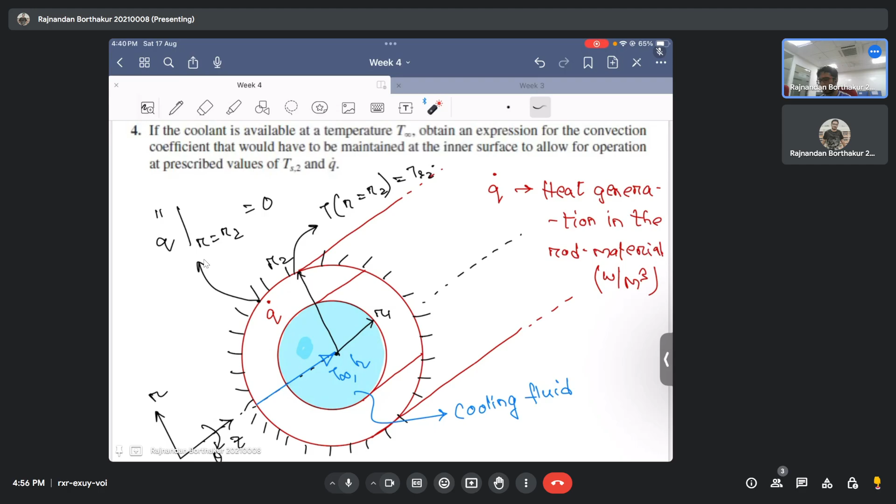If you do this, you can do it at your space and see that Q dash eventually comes out to be minus pi times Q dot into R2 square minus R1 square. Or in terms of temperature, you can also write this, but it's okay. Your Q dash basically comes out to be this.

You can have a nice inference from this expression of Q dot. This is again related to the control volume approach that we did. Whatever heat is generated by this Q dot has to be dissipated. So if you do a heat balance, or an energy balance, you write Q dot in minus Q dot out plus Q dot generated equal to 0, which means your Q dot out is basically the flux times the area, and this is equal to Q dot generated.

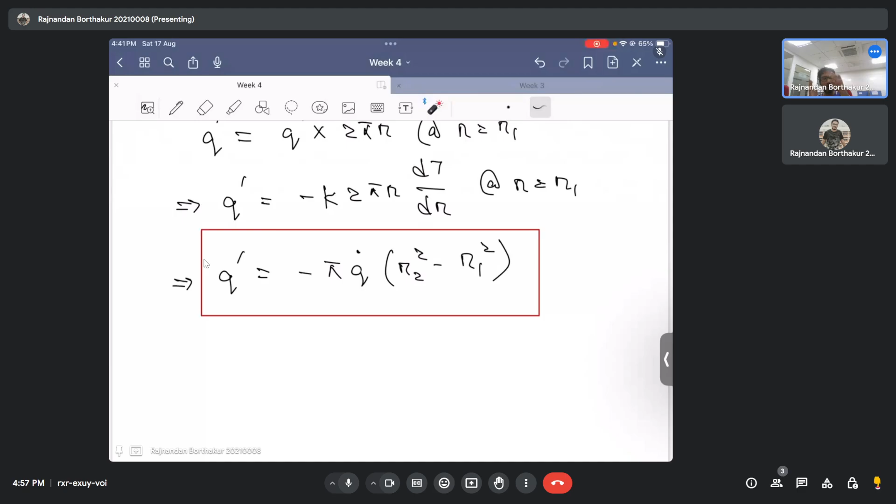If you exactly do that, you will end up getting exactly the same equation, which is pi times Q dot into R2 square minus R1 square. Just do the energy balance that we did in the last problem, and you will end up getting the flux as this. So in two ways you can do it: either use Fourier's law, or use the energy balance in solving this.

The final task is to calculate the heat transfer coefficient, and we will end this problem by calculating the heat transfer coefficient here. So the final task is to calculate the heat transfer coefficient.

For this, we will use the energy balance at the interface, which says that your conduction flux is equal to the convection flux - or rather, the rate of heat transfer per unit length by conduction is equal to the rate of heat transfer per unit length by convection. We know that this Q dot conduction is basically equal to this, because this is your Q dot conduction, so this becomes minus pi times Q dot into R2 square minus R1 square.

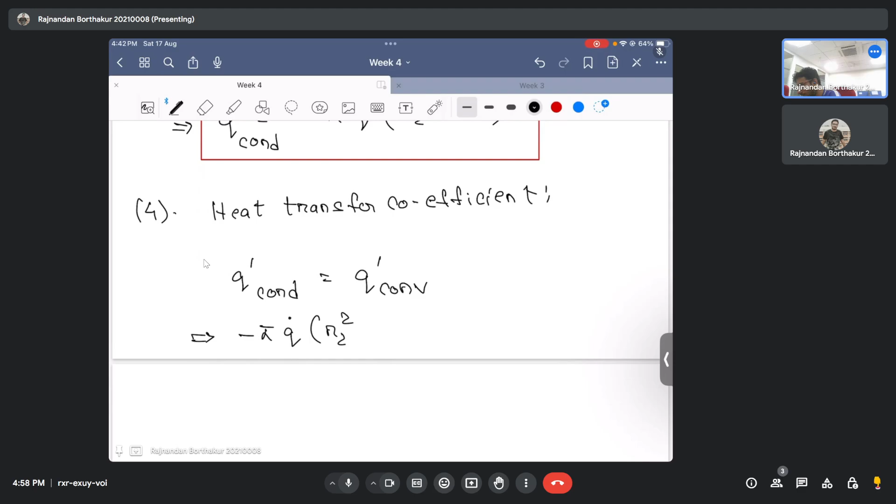Your Q convection, this is basically from Newton's law of cooling, as we've seen, is H times 2 pi R - here it becomes R1 - into the temperature at Ts1 minus T infinity. So this is just H A delta T that we have written.

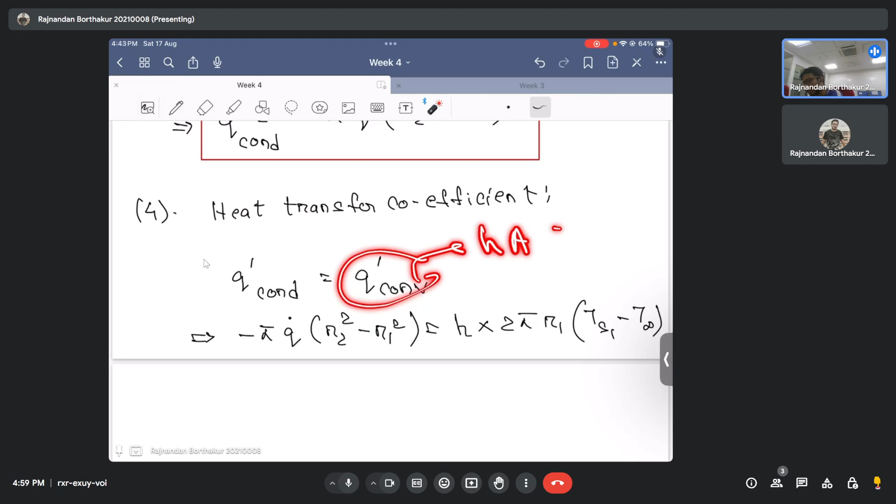That is because, once again, if I apply the energy balance on this interface, the flux coming out from this rod to the interface is the conduction flux, Q conduction, and the flux going on to this fluid is Q convection. At steady state, since interfaces cannot store energy, whatever flux comes inside the interface should be dissipated to the other end of the interface.

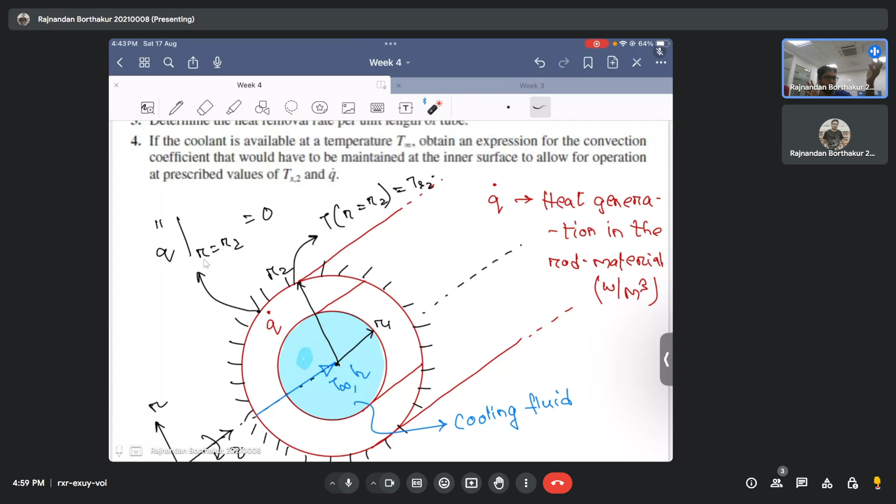Okay, and that's why at steady state we wrote that this conduction flux is equal to the convection flux. If you do this math, you will see that your H, the heat transfer coefficient, there will be some cancellation. This pi and pi would just go away, and your H has a simplified value of Q dot into R2 square minus R1 square divided by 2 times of R1 into Ts1 minus T infinity.

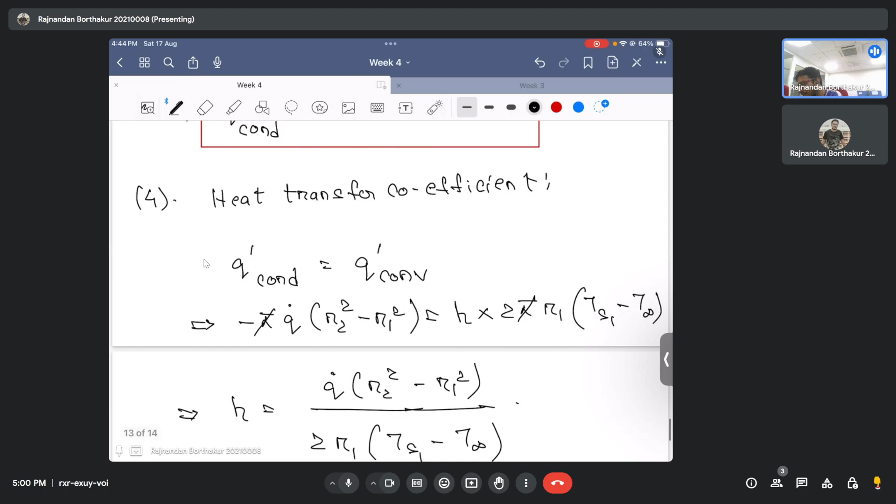This Ts1 is basically the temp. So this Ts1 is not an unknown. Just try to realize that this Ts1 can be obtained if we just put R equal to R1 in this temperature profile. It's not an unknown because we have already determined the temperature profile. Which means that Ts1 is known.

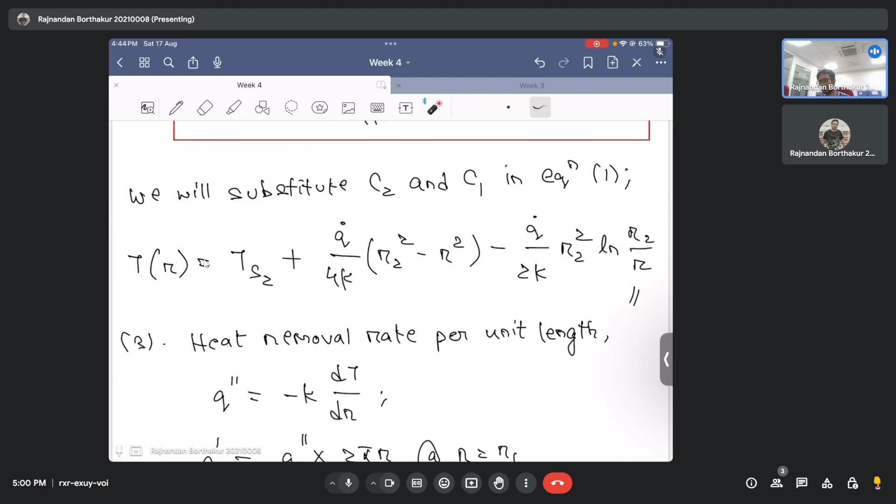The only unknown that we encountered is the heat transfer coefficient, which is what we are basically trying to solve for. And typically this is the value. So remember, this Ts1, although it appears to be an unknown, it's not an unknown because the temperature profile inside the rod is completely known. This is basically T at R equal to R1 for the rod. All right guys, I think this ends the discussion on this problem.

I think today we really solved some problems related to heat generation in slabs and cylinders. So I think you guys have appreciated how we need to go on with the approach and try to correlate between the flux and the energy balance that we apply. We see that irrespective of calculating the flux through Fourier's law, or calculating it from the energy balance taking a control volume approach, you will eventually encounter the same answer. This is typically the idea, because the Fourier's law and the heat diffusion equation essentially are a big picture of the energy balance only.